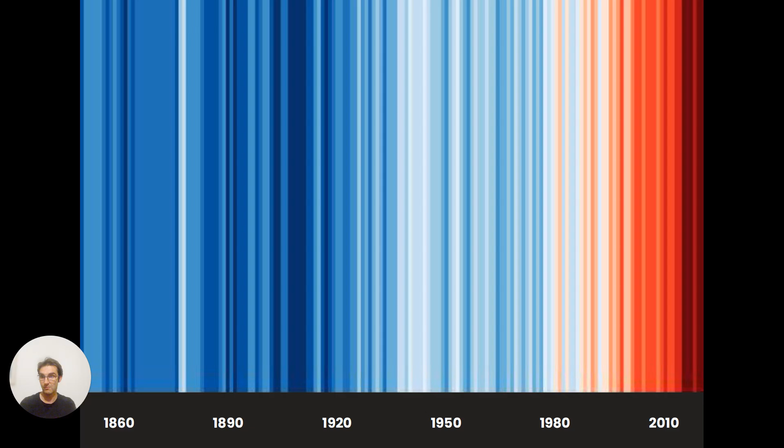In terms of the town centre zone, we looked at the different demographics, and it was primarily married couples with children. More than 60% of the households are families with children. There have been campaigns for services to serve the growing population and the families, with a campaign for a new secondary school. And there have also been increasing national and global pressures, most notably with the rise in temperatures and also with flooding. And it's thinking about the Town Centre First plan in those contexts as well.

Ireland, like Newtownmountkennedy, has a population that is growing rapidly. Ireland, in the context of Europe's population, is growing very rapidly as well, and is projected to have almost a third increase from 2017 to 2050. So that's the kind of context that Newtownmountkennedy's Town Centre First plan is being developed within. So really, how do we respond to the recent rapid growth and ensure Newtownmountkennedy thrives into the future?

We also talked about the different themes in terms of heritage, green public space, mobility, energy, commerce, and community services. We asked the community to rank these by importance to them, and both the online survey and the in-person workshops got the same top three: green public space, community services, and mobility being the key focus for the community.

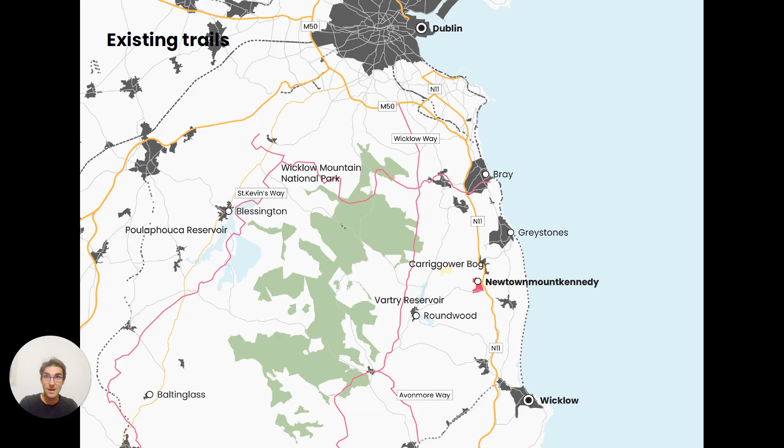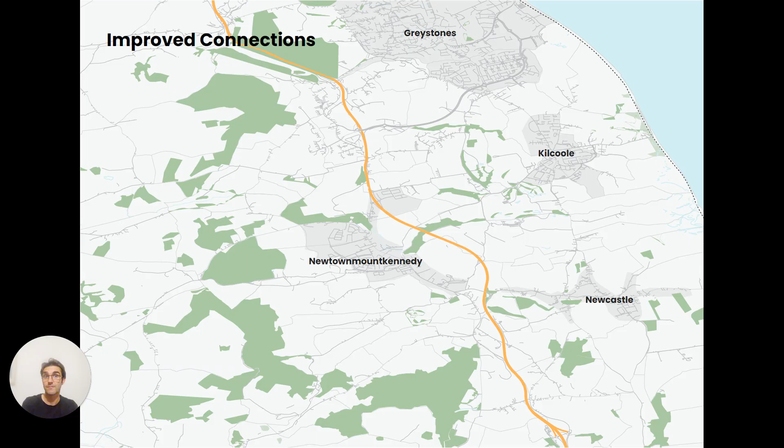So in terms of mobility, where Newtownmountkennedy sits in Wicklow, there are many existing trails beside Newtownmountkennedy. A lot of them pass by. There are some proposed trails, including the Mountains to the Sea Trail. In terms of connections, Newtownmountkennedy sits in relation to Greystones, Kilcoole, and Newcastle, and out to Roundwood and the Wicklow Mountains National Park. So one of the first proposals was this idea of linking in with the Mountains to the Sea trail, connections potentially to Greystones, to the East Coast Greenway, the informal Greenway as it is, a potential Newcastle connection, and the existing bus networks, how it currently works.

And one thing that became apparent through the initial discussions was the current way that public transport is set up. For example, to go from Newtownmountkennedy to Kilcoole, you have to take two buses. It takes 54 minutes, but if you walk, it would be 57. So there's a massive opportunity there to improve the bus network so that it's an easier way to take the bus, and probably get people out of cars and discourage use of the private car.

Between Newtownmountkennedy and other towns around, you're seeing the same issues, where because the public transport's not aligned, it's taking quite a long time, even though the distance is actually quite short between the towns, between that and Glendalough, for example. So a potential proposal was maybe an application for a Local Link.

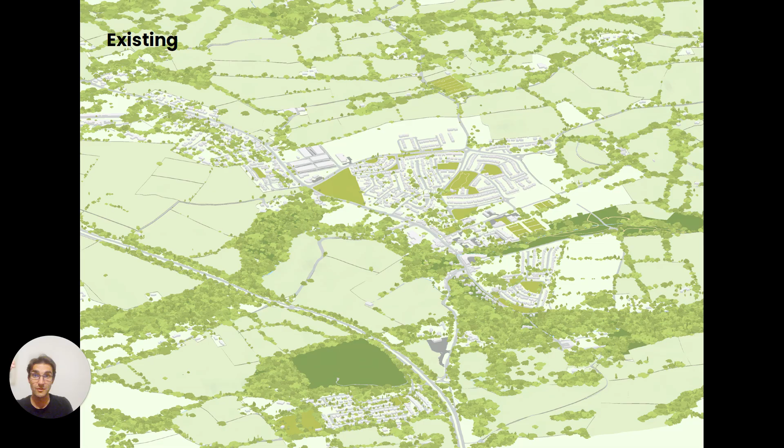So connecting between potentially Greystones and Roundwood and Kilcoole as well. In terms of the existing, we had a map that we presented out and showed the existing Newtownmountkennedy and then the areas that I think are under development or are in planning currently or proposed. So seeing that there's even further expansion planned for the town, despite all the expansion that's already happening, so there's a lot more residential units coming.

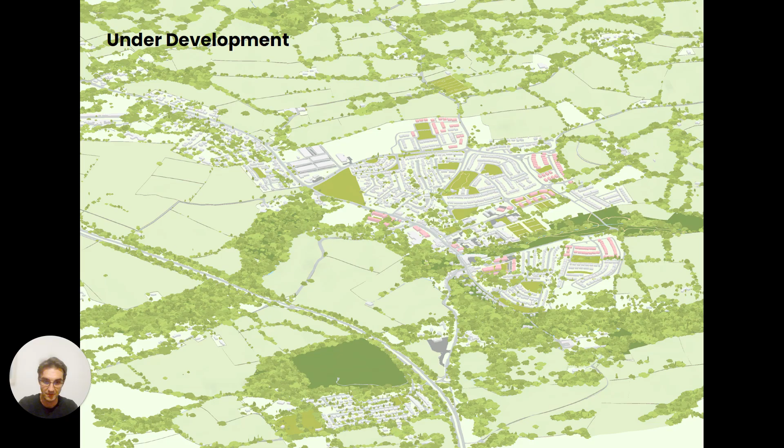The community highlighted some of the key challenges with this in terms of narrow roads, in terms of bike lanes, the lack of bike paths or narrow footpaths, and where congestion was at pinch points. And we're going to show now some of the responses to the key challenges highlighted by the community in the first workshop storytelling.

So our key strategies that we developed from the challenges that were highlighted during the first workshop was to increase cycle and foot permeability, provide clear route hierarchy, improve public transport distribution, traffic flow optimization, discourage Main Street traffic, encourage Main Street footfall, and encourage active travel.

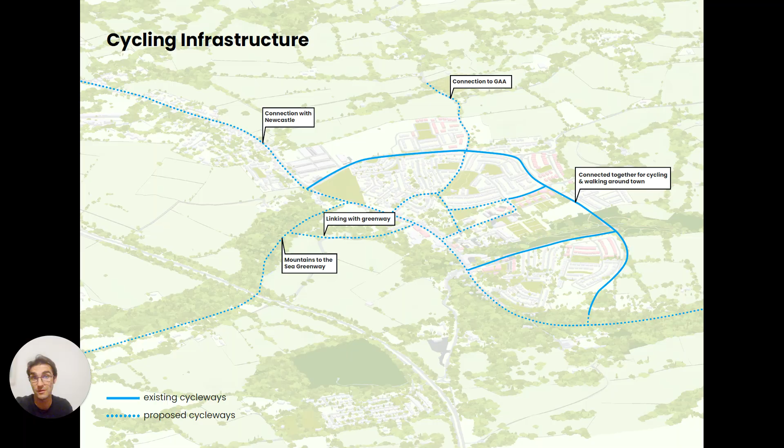In terms of the current bus route, we've highlighted where the bus stops are in use and also where the proposed bus stops are, the new bus stops that are being created but they're not being used. We've even proposed a new bus stop where it's earmarked for the school development. So maybe there's a potential alternative bus route that links around the new developments around the town without people having to go down to the main street to catch the bus.

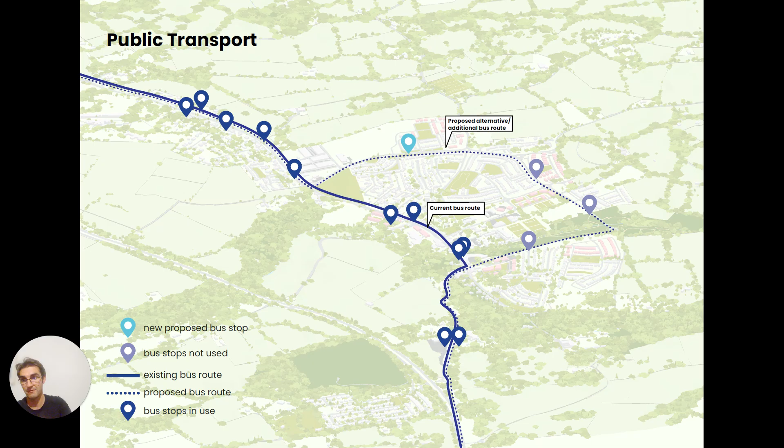And then if you see that overlaid with the cycleways, there may be opportunities there for potential bike drop-offs and taking one form of active travel to get onto public transport. So even incorporate principles like park and rides.

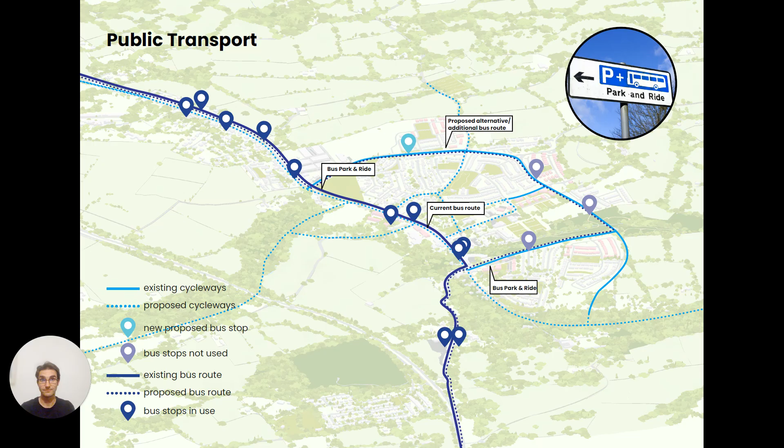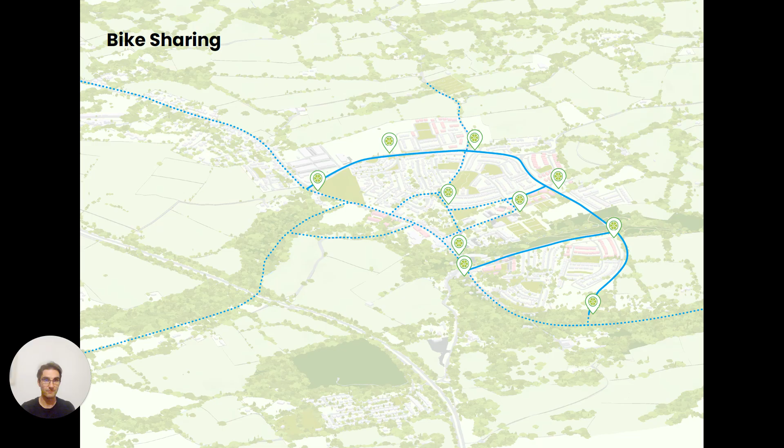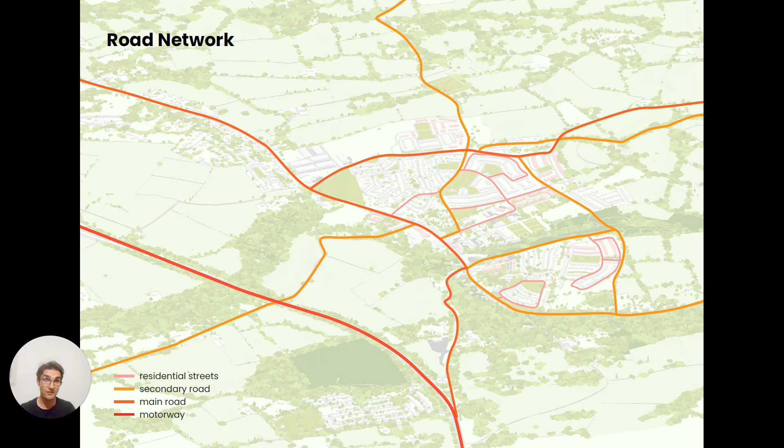In terms of the road network, you've got the main motorway to Dublin. You've got your main roads, your secondary roads, and then you've got residential streets. You've also got many dead end streets, and this is a problem that's been highlighted in a lot of our work across Ireland, where in residential developments the cul-de-sac is preferred, but what that causes is a lot of roads literally to nowhere, and as a result, there's not as much permeability in the urban realm.

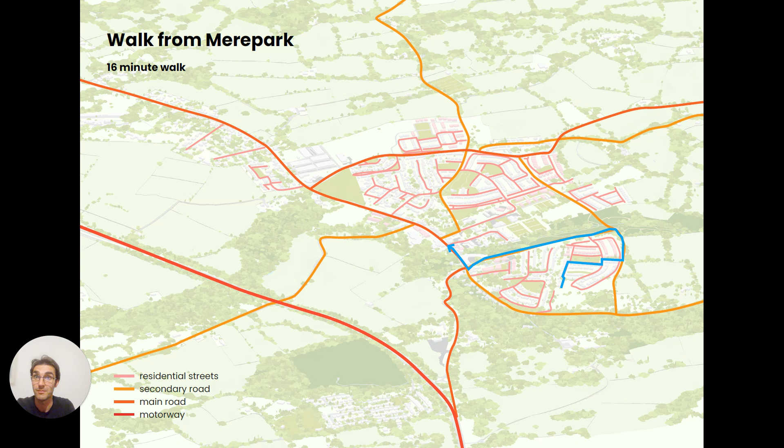So, for example, from Merepark, it takes a 16-minute walk, whereas if you actually had increased permeability, you could bring that down to a 10-minute walk from the same place, just to have those little connections at the end of what were cul-de-sacs. Same again from Monalin, with some increased permeability, you get the 9-minute walk down to a 5-minute walk. And this helps people make a choice of maybe not taking the car, but actually walking instead. So an example of how that could look.

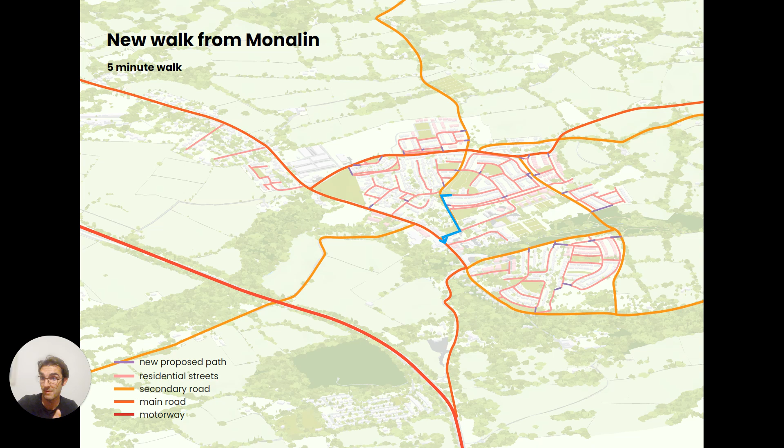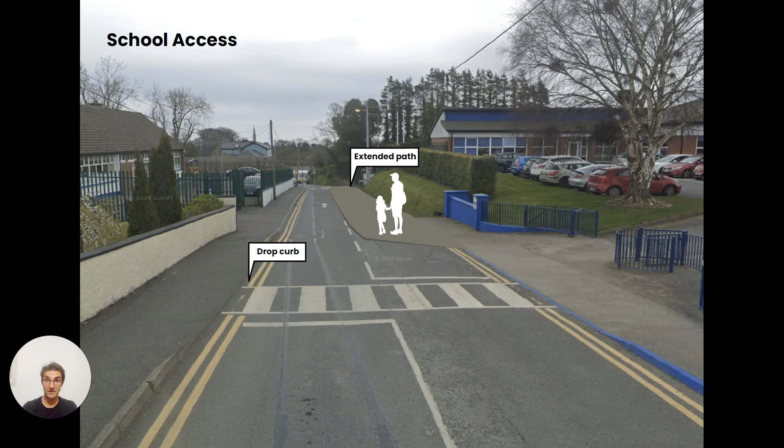In terms of some moves that could be done, we dropped the curb, which has already been done actually, extending the path down into the town itself, the main street. And also what we discovered was the current traffic movement, because it's two-way traffic, lends itself to quite a busy junction with the tight streets.

So one of the proposals from the community was potentially making this a one-way system, which does a couple of things. It encourages the use of the ring road, but also it gives us a lot more space and the opportunity for a drop-off lane where there is a series of schools and creches and community spaces. So it makes it a safer space as well. So this could be the potential situation if we did drop it to a one-way road with a drop-off lane.

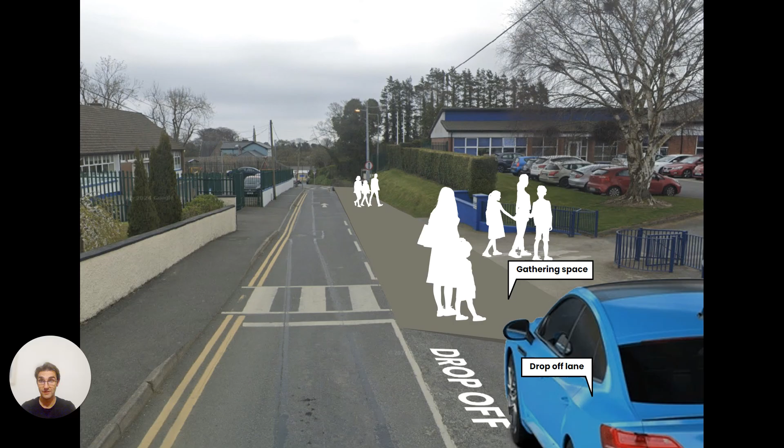You could have some gathering spaces for people to gather, instead of it being dominated by two lanes of traffic. And then maybe some additional space, you could even look at bike paths. So these are some of the improvement proposals. In different ways you could even approach that from further down where Duns is. Different ways of managing the traffic flow to actually alleviate some of the pressures.

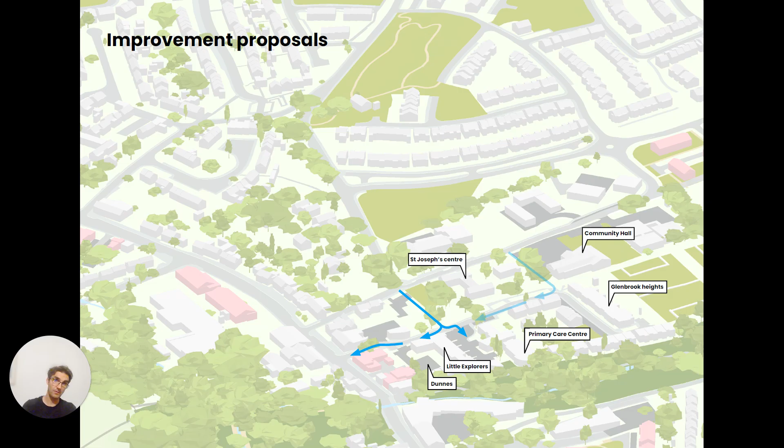In terms of mobility on the main street, people discussed the traffic lights were causing delays, and there was a proposal potentially for a roundabout on that junction.

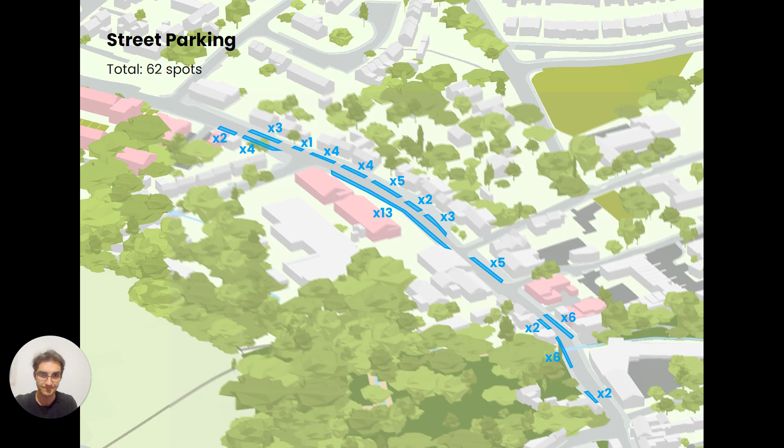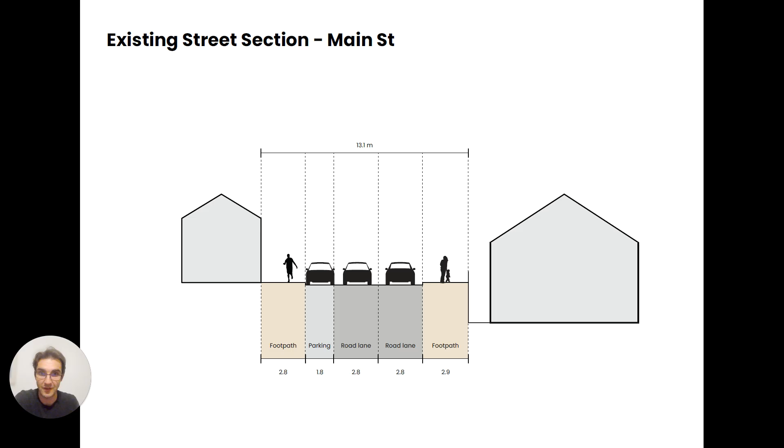In terms of street parking, there's 62 spots currently on the main street, and the current section with two lanes and one for parking, you've got a 2.8 to 2.9 width footpath. This changes a little bit as you move up the street, but that's from the section line we took in the middle. So if you were to make it two lanes with two-way cycle lanes, you would have to reduce your footpath down to around 2 meters. And that's what it would look like.

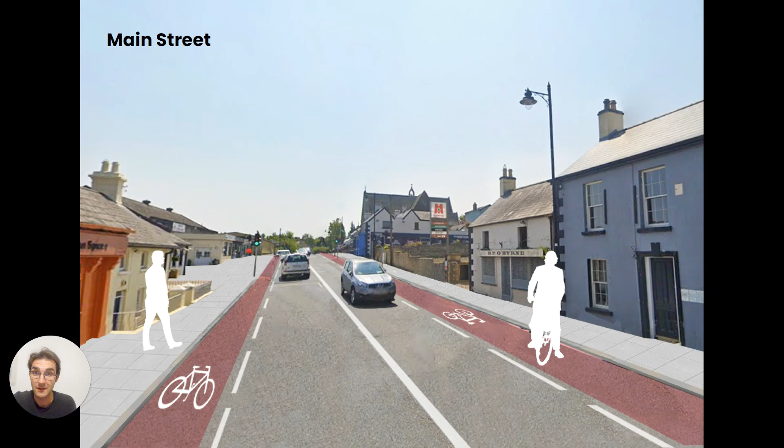And also a lot of people were talking in the surveys about areas for safe crossing and traffic calming measures along the main street due to the heavy congestion with cars. Discussions were had about the potential for slowing down and increasing main street footfall through the potential use of shared surfaces and extending the public realm as well.

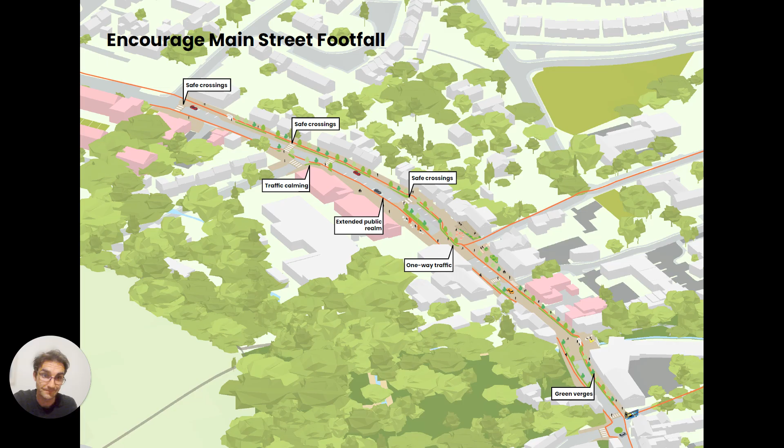Other discussions were around the current traffic flow. So currently, as per Google Maps, it takes 2 minutes to go along the main street from the Fisher's roundabout all the way down to the Wicklow Way and the brewery and the enterprise centre. But ideas were highlighted about a proposed diversion where you use the new roads created around the town and create almost a one-way system along the main street.

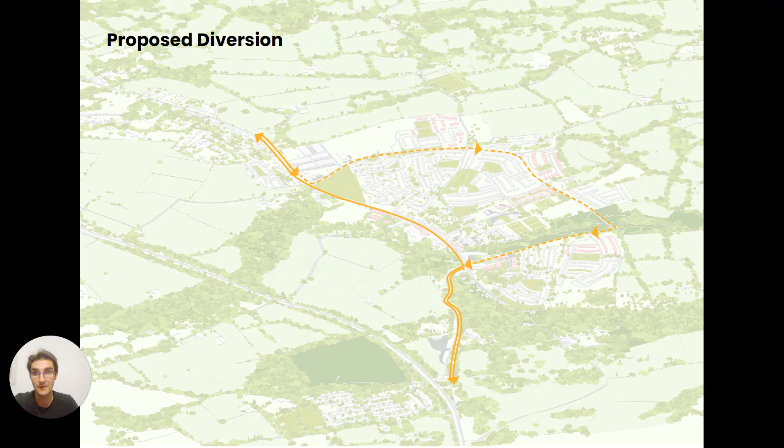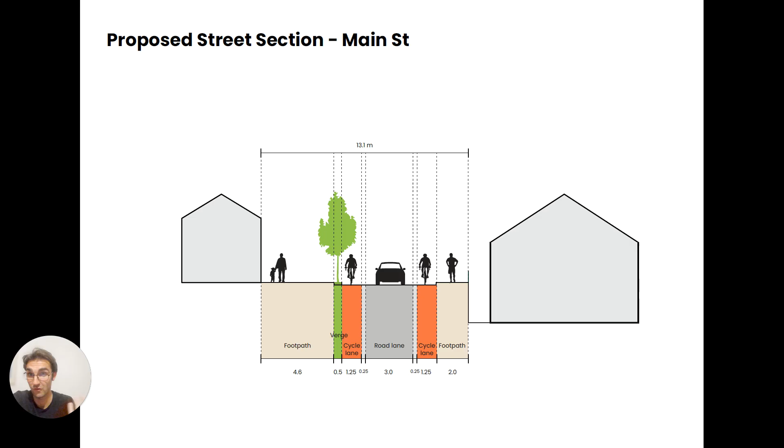Currently, according to Google Maps, it is 3 minutes to go around, but there's a massive gain there if you do move to a one-way system down the main street. If we left it with two lanes of traffic and two-way cycle lanes, versus switching to one-way traffic, you get a lot more space for people on the main street and also the opportunity for potentially a green verge or some tree planting. You also have the opportunity for more parking on the main street because you don't have the space challenge of having the two lanes.

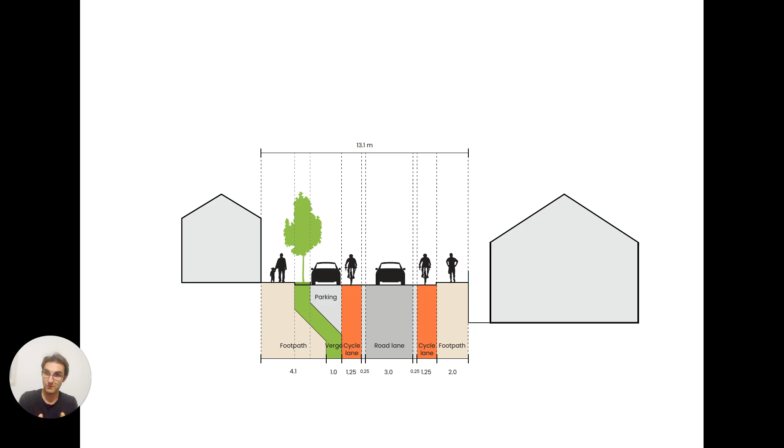So this could be what it could look like with the introduction of a green verge and potentially some trees on the main street, but also additional parking spaces as well. And with that green verge, we could also explore the idea of sustainable urban drainage, and that discussion we were previously having about what makes a climate resilient space. Ireland is going to become warmer and wetter, with higher temperatures but also higher rainfall events. So how we could use sustainable urban drainage to help the town adapt to that change in climate.

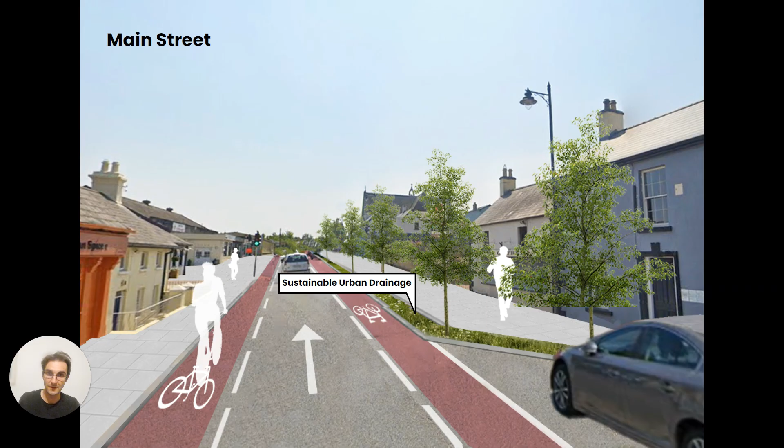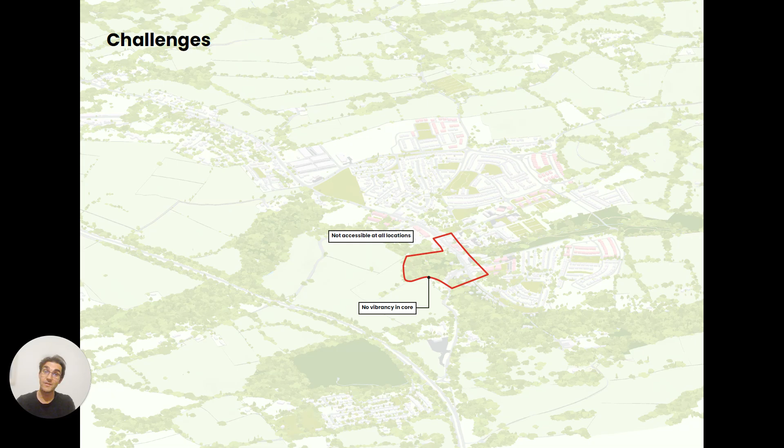The lack of vibrancy in the core and not accessible at all locations. So what we were looking at in terms of strategies was providing a generous public space, making the public realm accessible and inclusive, integrating climate resilience, include trees and greenery, showcase historic spaces and buildings, encourage vibrancy, and create a distinct town branding.

So due to the location of Coillte's headquarters, there were a few ideas put forward about leaning in on that and the idea of using timber in your street furniture as a way of highlighting Newtownmountkennedy's kind of unique location for the headquarters of Ireland's Coillte.

In terms of Fisher's Square, one of the ideas of how to explore how you could maybe better utilize that space as one of the first things you see as you come into the town from the north. So maybe opening that up and creating a public square, incorporating some rain gardens, nature-based solutions, examples of the timber lighting or the wood street furniture we discussed earlier.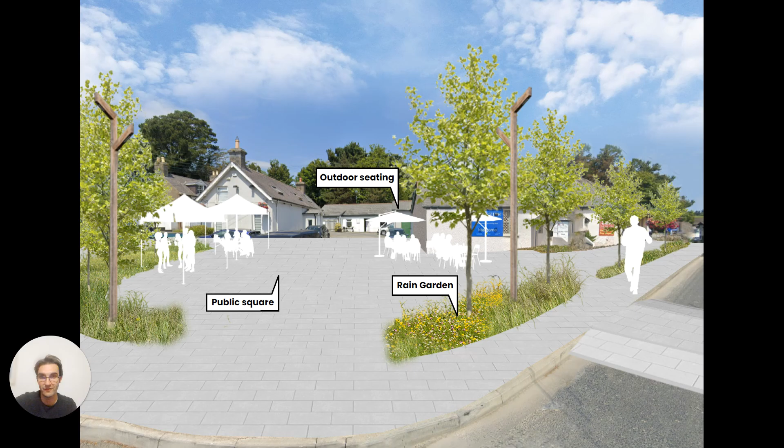The idea of potentially a town square and what that could be like. So looking at the space between Dunnes and the Parkview Hotel, potentially decluttering some of the space from some of the different things found on the main street. Bringing in the idea of more public space, maybe a bit more shared safe surfaces, safe crossing, incorporating with the cycle lanes previously discussed in the mobility, and bringing in nature and the green verges as well and the town branding aspects.

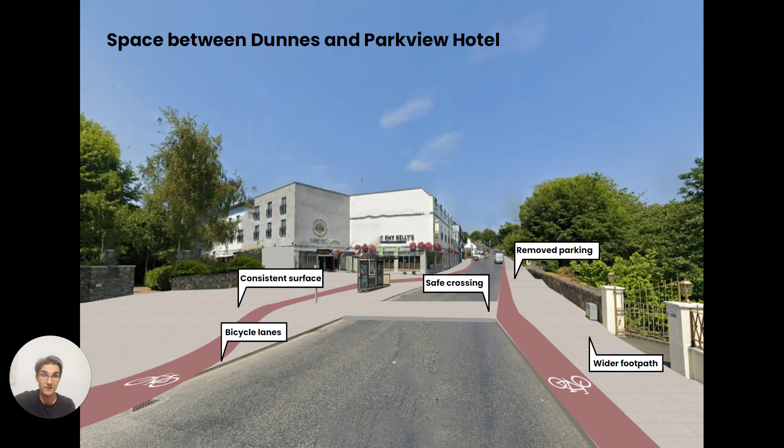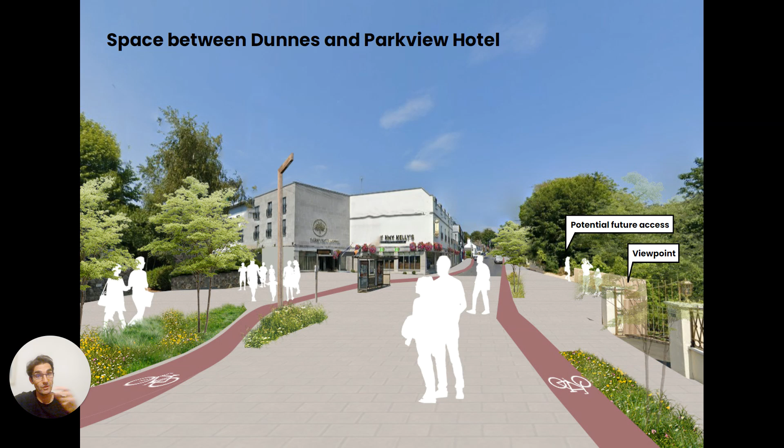So you can start to see some of these ideas being layered up again, and some of them are overlapping. But could this help to maybe create a more distinct town square? And again, the principles of shared surfaces. Learning from that, maybe some ways of doing that materiality that can make it a bit more accessible, increase the accessibility as well for some distances. Discussing potential future access and viewpoints out maybe into the valley from this town square. So viewpoint.

In terms of the churchyard, beautiful church, around halfway down the main street. Looking at how that would look with a new kind of public realm, and potentially even just removing the fencing. It was built for a reason at the time, but in some ways it's such a beautiful building to be celebrated. You can actually see it and have more of a connection with the building itself visually.

Accessible spaces. People were talking about access to the shops, making sure that they can be accessible for all, and that's one thing we want to create in all our spaces, that they are inclusive and accessible spaces for all. So playing around with how we could work with the different levels to allow people with disabilities as well to access the different shops on the main street. This could potentially take the form of integrated ramps.

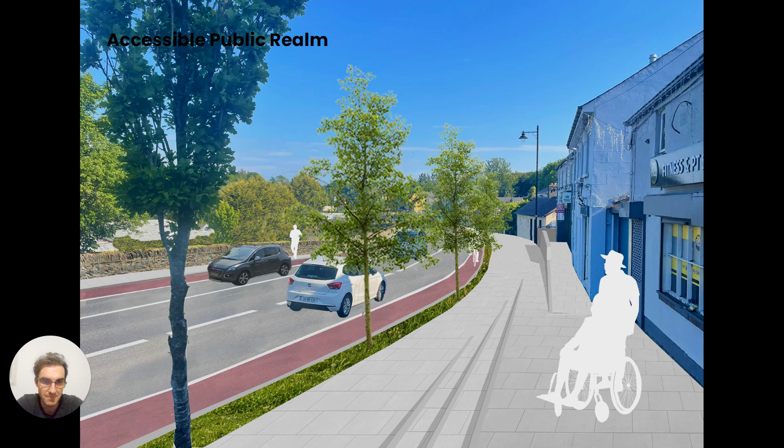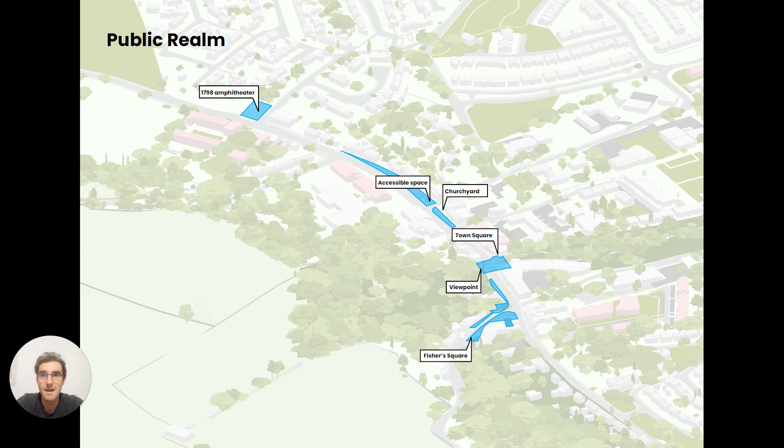There was talk about celebrating the town's heritage a lot in the feedback from the storytelling phase and the 1798 memorial. Could we better utilize that space? Maybe incorporate some sustainable urban drainage, but also some outdoor seating as well. Maybe using the same stone or whichever surfaces that we choose in terms of the development of the public realm.

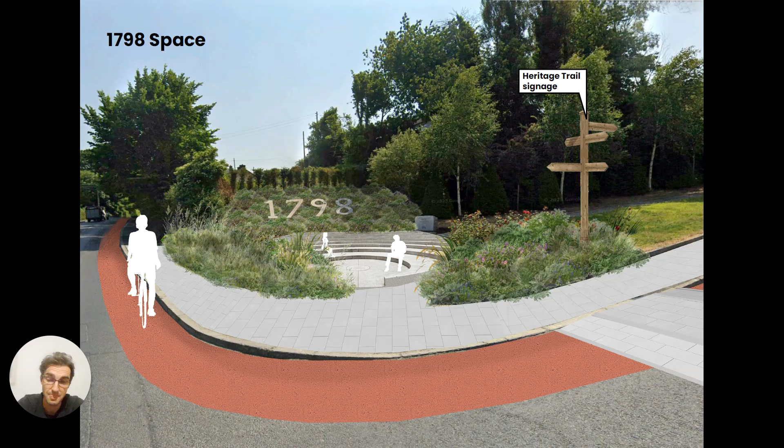Heritage trail signage as well was brought in because there already is an existing heritage trail in the town. Even during the first workshop, there were some interesting discussions where we were presenting back the heritage, and a lot of people came up after and were like, I didn't even know about that, so it's making this more accessible and people more aware of that. So could we take some of the great work that's already been done and use wayfinding signage to actually celebrate the town's existing heritage? So through creating a heritage trail.

And what about the green spaces in Newtownmountkennedy? So some of the challenges were the lack of connectivity between these green spaces, accessibility issues, a lack of variety, and the linear park with the unconnected plots with different ownerships. So one of the key moves that was brought up again and again was linking and developing these green spaces.

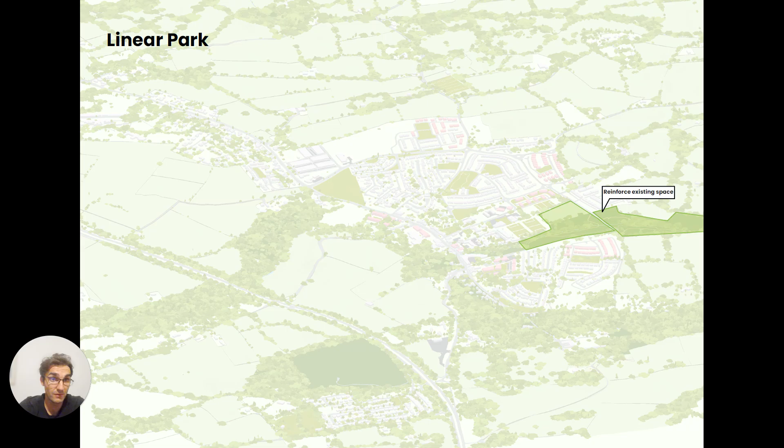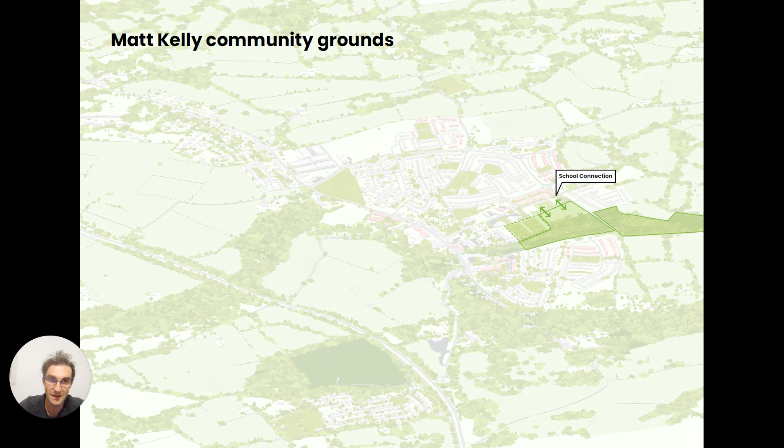So reinforcing the existing green spaces, and this is the proposed development that's currently being built, but connecting them with the existing infrastructure that's there and the schools that already exist. So you can see the connection here, the new linear park, but it not being integrated with the existing, and this lack of connections with the existing school that is there and the playing fields.

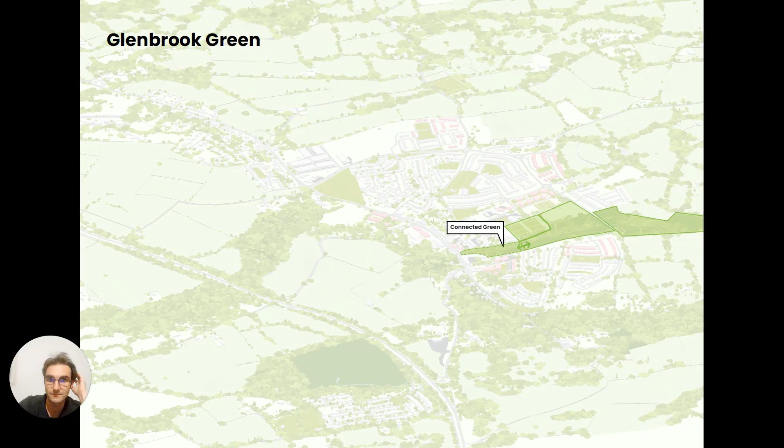So connecting in with the green. And also, in terms of accessibility, if there is a slope, how do we work with that and maybe have fun with that and actually create spaces that can be playful, even if there are some topographical challenges. And if there's water, how best we can actually integrate that in as well into the design.

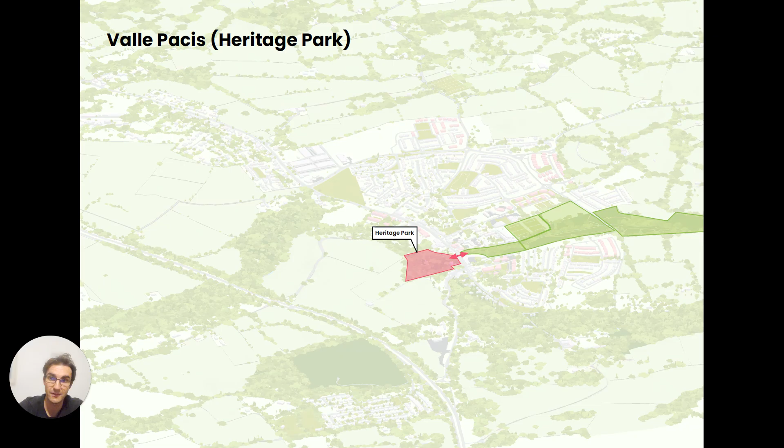So potential future connections as well. So first one linking, second one the potential future connections. In terms of linear park, a lot of talk was about Valle Pacis in the centre of the town as well, and the potential of that being part of a kind of a heritage park, having a form of connection there. And potential access from the main square, if we were defining the outside the Parkview Hotel, that being the new square in the town, could then be a linkage into Valle Pacis from there.

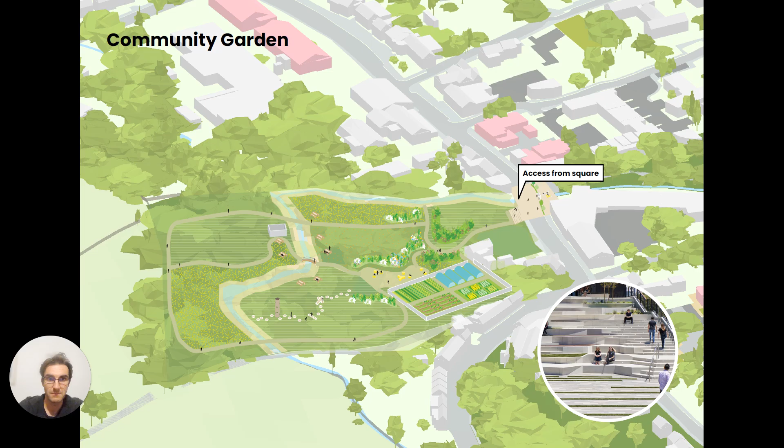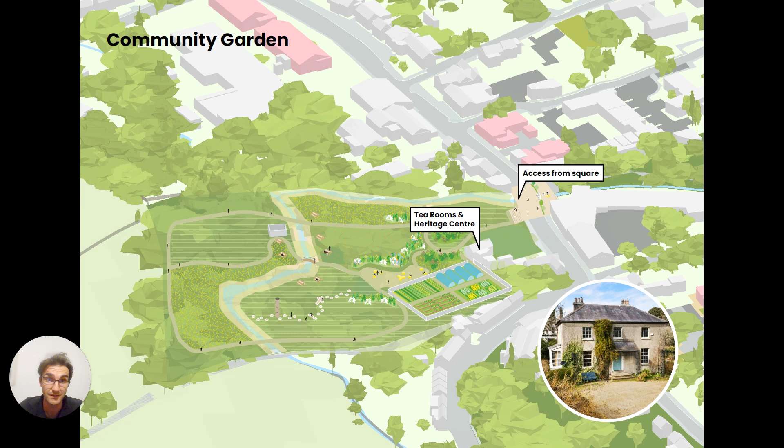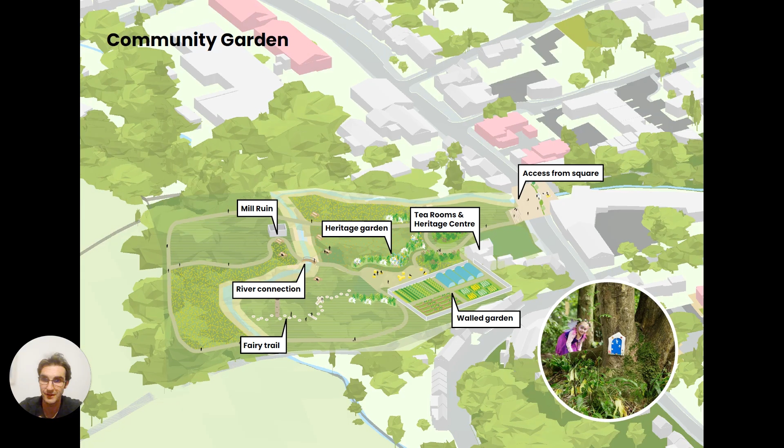The different buildings that already exist on it, could they be utilised in a different way? Maybe bringing in a fairy trail, the current usage and potential usages, and the existing Valle Pacis with really old growth trees. And how we could maybe create a riverine walk so people could actually enjoy that, but making sure that it's very, very low impact in terms of how we bring trails through the site so that it's maximising and maintaining the high levels of biodiversity that already exist on the site.

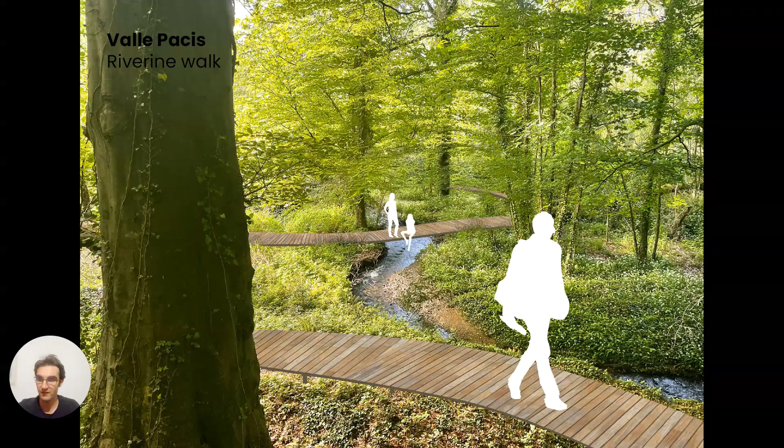There's a fantastic mill ruin there. How do we develop that, or do we develop that? Different opportunities, potentially it's a picnic area or a playground or just a place to hang out and enjoy the nature and the space. Maybe it's about restoring it back to what it previously was. Again, these are different ideas that were proposed by the community. We are just trying to visualize back the different opportunities that exist.

An example of one of ACT's projects that's currently going to planning, where it's taking an old building that initially the community were looking to develop the site, thought it wasn't worth keeping, but through the design process, it actually became apparent that this was part of their heritage of the area, and the old landlord house being actually maintained and restored in a way where it was reused or readapted in a different way, and actually led to being a kind of gathering space and a viewpoint space, and creates its own interest in architecture as a result.

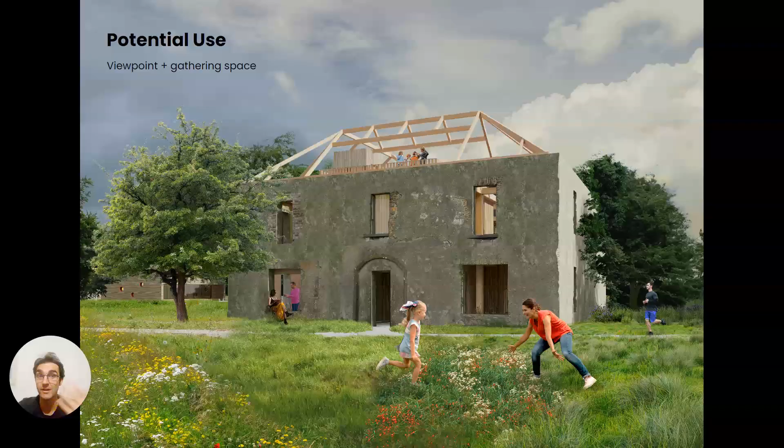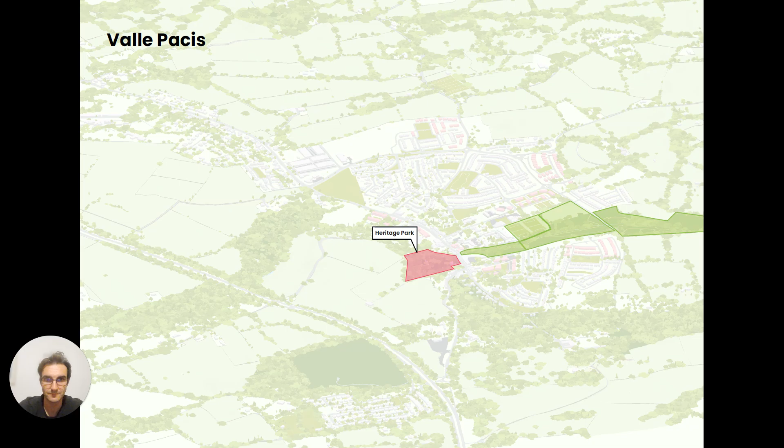And then the potential for linkages. It's a lovely green space, and we heard in the workshops this was actually the place where many people went sledging when it was snowy on this hill. Maybe the potential for an amphitheater, or maybe even a natural, very low impact one, maybe not as engineered as this, but maybe just working with the slope. That was one of the ideas proposed by the community.

In terms of the Wicklow Hills Park, there's discussions maybe of using the height, maybe having some form of viewpoint. That was another idea that was proposed, reimagining Wicklow Hills Park. Maybe a dog park. There were a lot of people discussing the areas. There's a lot of residents moved in. A lot of them have pets. Can we have a designated spot for dogs? Maybe a pump track for teenagers.

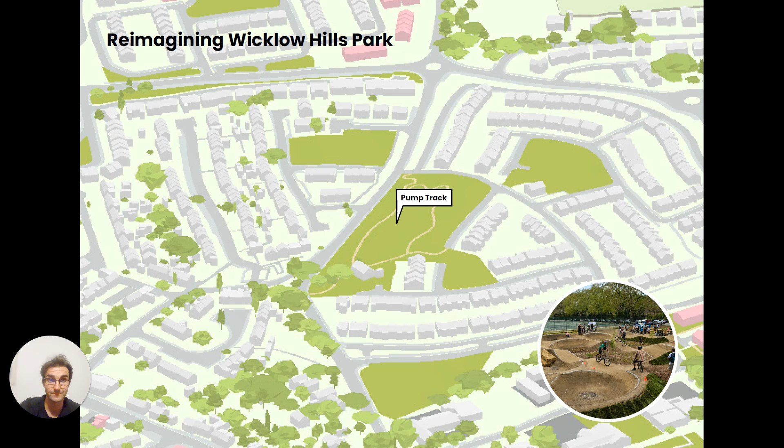In terms of the community services, one of the key things that was very apparent in the storytelling was with the rapid increase of housing, the services to facilitate the housing weren't keeping pace, so there were a lot of gaps. So we obviously mentioned the secondary school, but there's other elements that were called out: no secondary school, no outdoor ATM, no bank, lack of youth services, no library or civic space, and different services that need to be filled for the town to be able to grow sustainably. So some of the key strategies we looked at were defining potential sites for community services, proposing combining complementary functions for efficiency of space, and considering future growth in service provision.

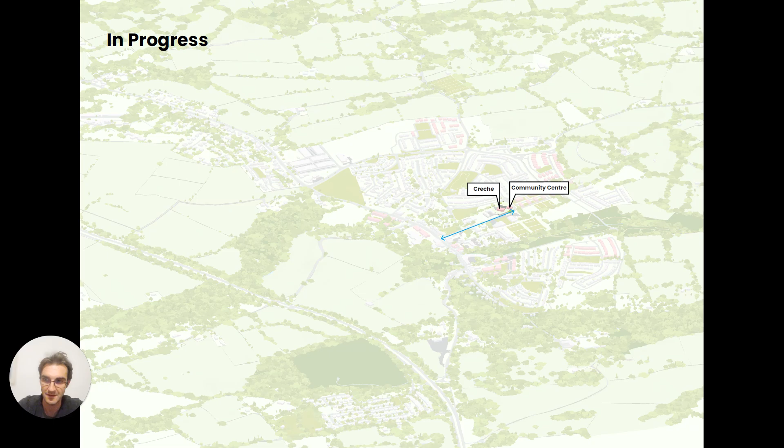So again, it's good to see that the creche and the community centre are currently in progress and are being constructed out of CLT as well, which is a very modern method of construction, timber as well, tying in with the Newtownmountkennedy location as well. What other potentials exist for community services? That was the question we were asking ourselves, and looking at potential vacant sites and seeing how they could actually be utilised in the designated sites, obviously from the school.

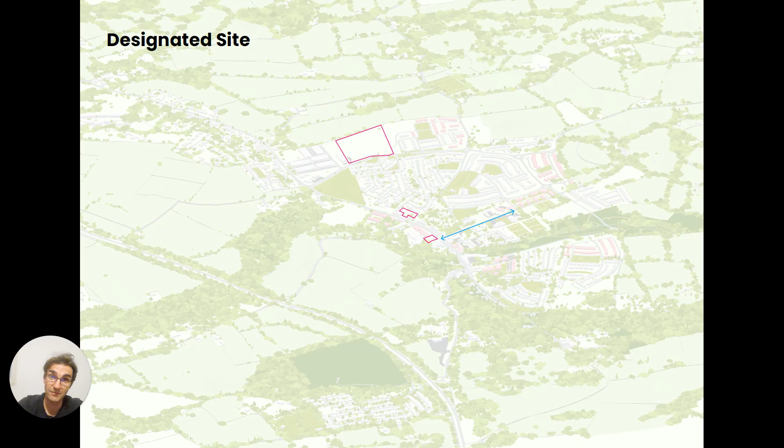So one of the key things discussed was the civic centre library. We felt that might be a good location along that main spine where many of the services have been kind of clustered, as you can see here. So could we utilise that space for a potential civic centre library?

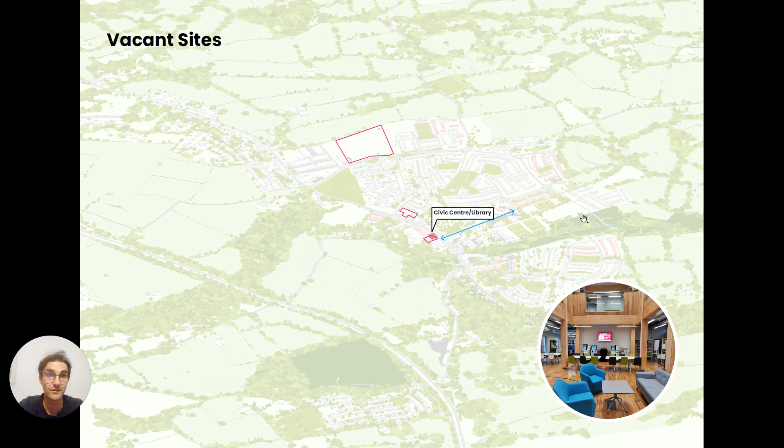So you see it coming down the hill between St. Joseph's and Robert Monteith. You see it's an opportunity for maybe a building that can be viewed from all four sides, like a public civic space, a civic building, and it could have different functions from the rear and the front, street facing.

And if we were tying it in with a strategy of developing a town square on the front end with the potentially single lane traffic, or whichever way we're going to develop that, there's lots of opportunities to make that building a very visual, prominent building and a good civic building for the town.

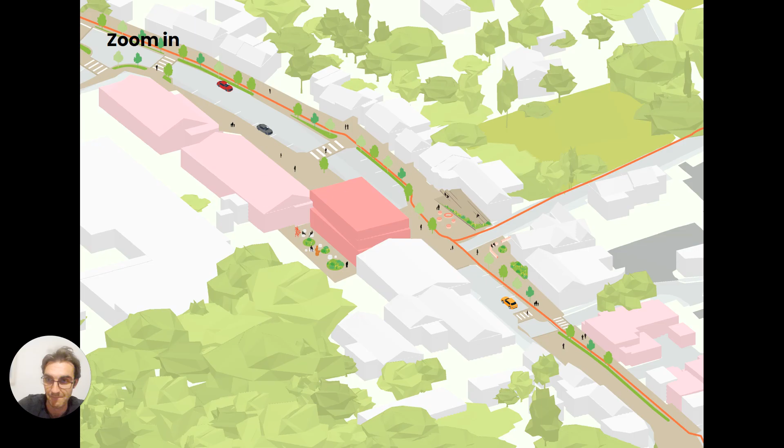Also looking at the idea of backland development as well. So there's several vacant sites, how we could better use them so you could step off the main street and have your facilities maybe clustered within a kind of separate little courtyard, maybe a space for a youth centre, a family centre, a GP. So this is what it could potentially look like off the main street.

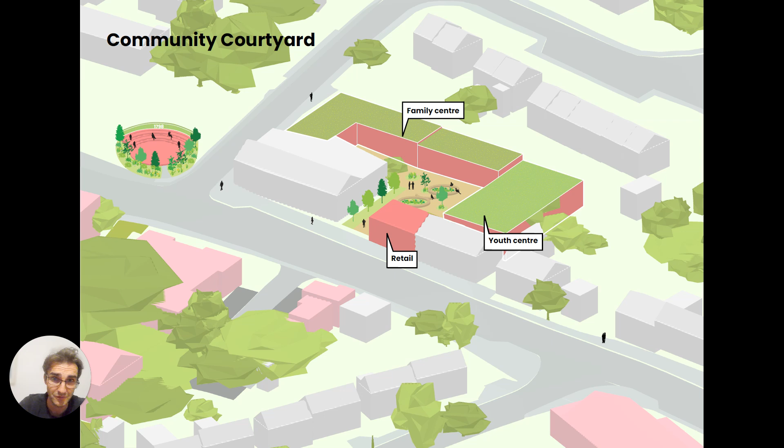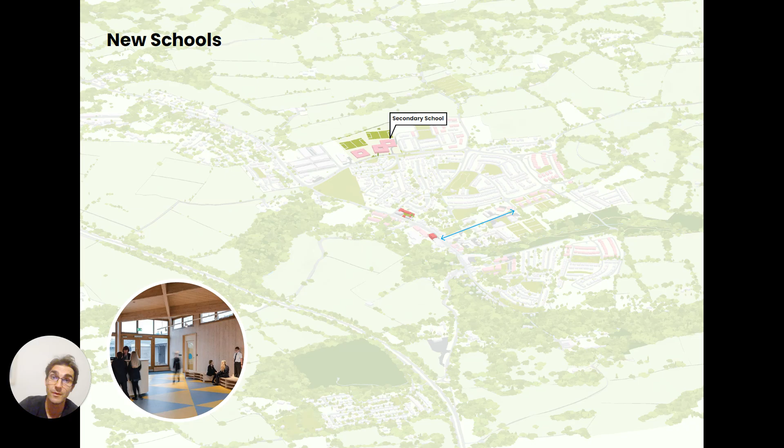And then looking at how the secondary schools could be developed up there on the hill where it's already been designated for a new school, tying in with the campaign. And maybe looking at primary school, there was a lot of discussion about the potential of a forest school, tying in again with Newtownmountkennedy being known for the Coillte headquarters. It has lots of woods around, so there's some opportunities there.

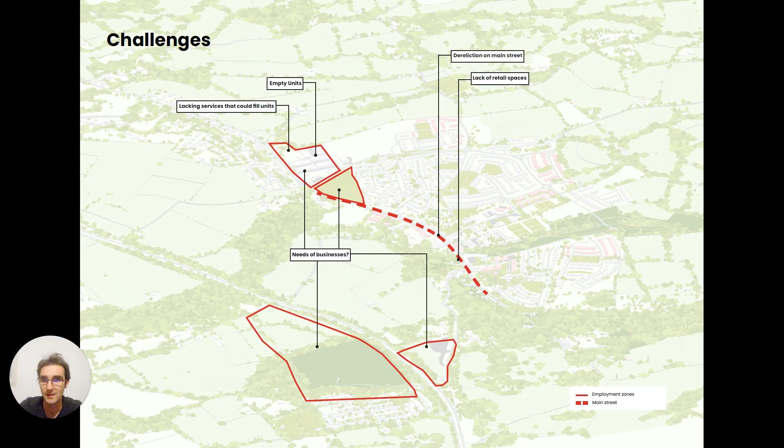And then in terms of employment and commerce, people were talking about lack of services and spaces for developing commerce and employment zones. So our key strategy was identifying key opportunity sites, encourage functions that match the image of the town, encourage mixed-use areas, reuse of vacant structures, densification of the urban core. So on one of the vacant sites, we looked at how you could explore a mixed-use development on that site.

And some of the ideas of, instead of having just one type, residential or commerce, having different types in one area. So it is a mixed-use development, tying in potentially the park and ride idea previously with the mobility idea. So trying to blend a few of the different features that were proposed by the community in the first workshop. Different potential opportunities of site activation.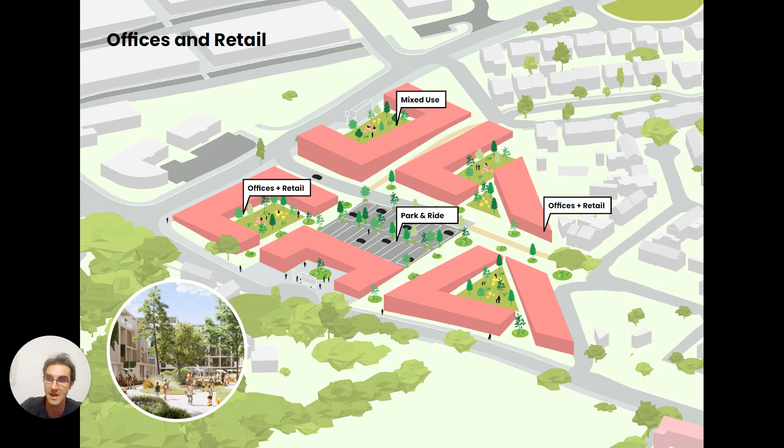Another aspect that was brought up was this idea of self-sufficiency in growing food on site, and looking at how that could actually be done, maybe bringing in polytunnels, a local co-op or a potential food growing area. So looking at different social enterprise market examples, one in Dublin, one in Limerick.

So growing local food in the town, and building on what we discovered during the discovery period process. There's lots of local food production already, and different companies have set up. So building on that brand and heritage already, and focusing on local production. Again, it could be different uses. So this is the idea that we're being very propositional back and forth.

It could be for local agriculture or locally grown food, or it could be for a dog park. Maybe the previous dog park location wasn't the right one. Maybe it's more suitable in this location. Or it could be an area for biodiversity, bringing more nature into the area. Maybe it's this area for focusing just on youth, like a youth centre, maybe the skate park, and a gathering space.

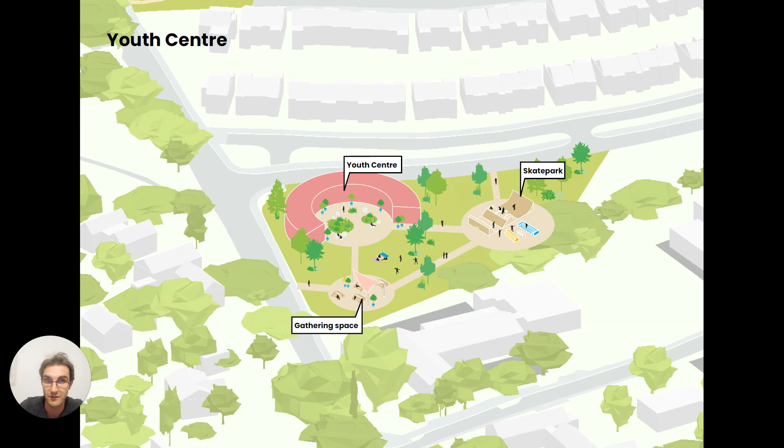There were discussions as well about this existing building that's found within the forest. Could this be a gateway centre, if we were tying back to this idea of the mountains to the sea forest walk or greenway? Could this building then be retrofitted or expanded and bring other aspects into it, like bike rental, an exhibition, a cafe within the forest? Maybe even tying into this idea of the woodland activity zones, and utilizing your forest in a different way.

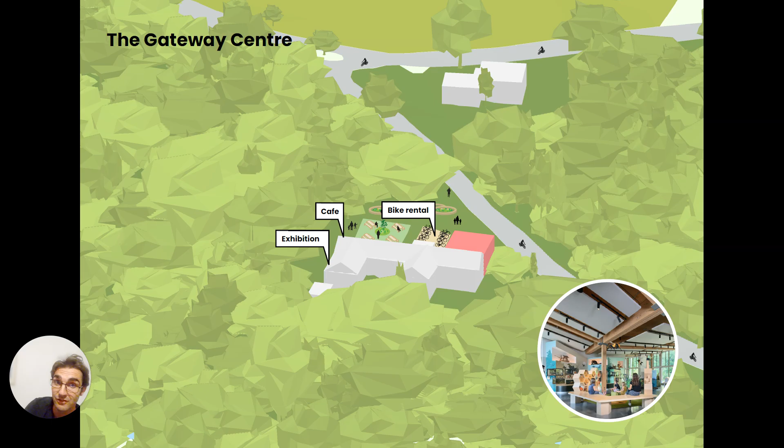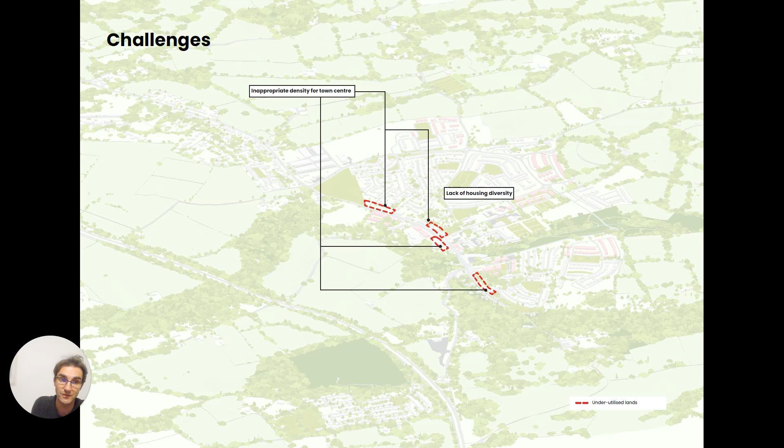So what other options exist for commerce, services, and residential? Well, there's also a discussion about densification and lack of housing diversity. So looking at the town centre analysis, what's currently being used and the different mixes that currently exist, and then seeing where there's an opportunity for densification. So these images are just to show, taken from that image, where opportunity sites are for densification.

If we were to increase the density of the buildings in the town, how would that look in terms of the scale of it?

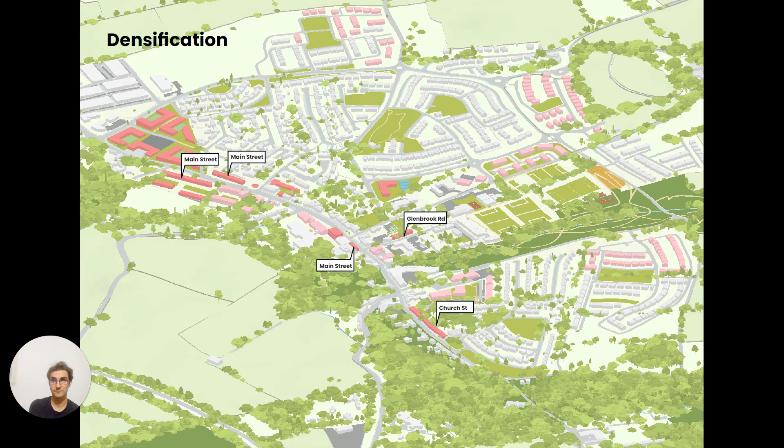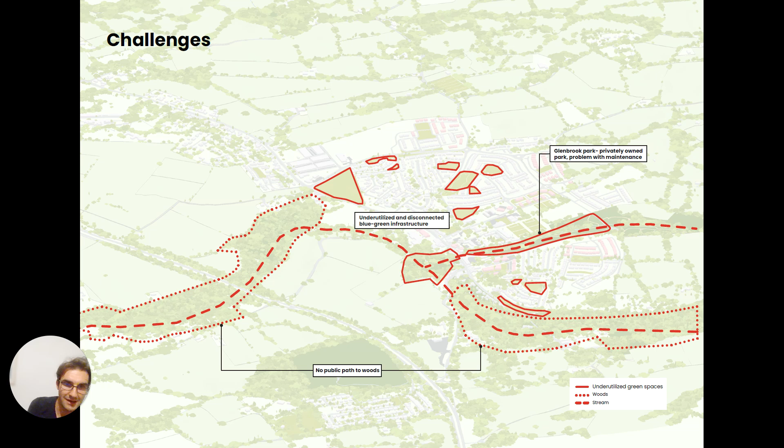Just layering up, potentially if we have the mobility and the overlap of mobility with increasing the green space connectivity at the same time. Again, just being propositional to see how best this could work for Newtownmountkennedy. So you've got the big, large woodland park, and also the existing woods. Is there an opportunity to connect?

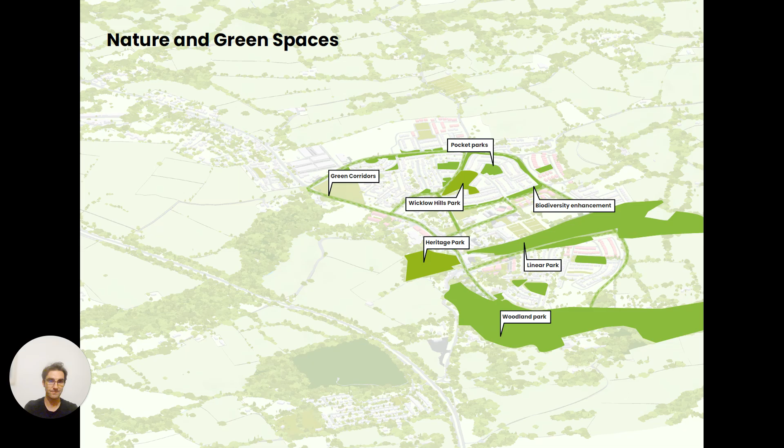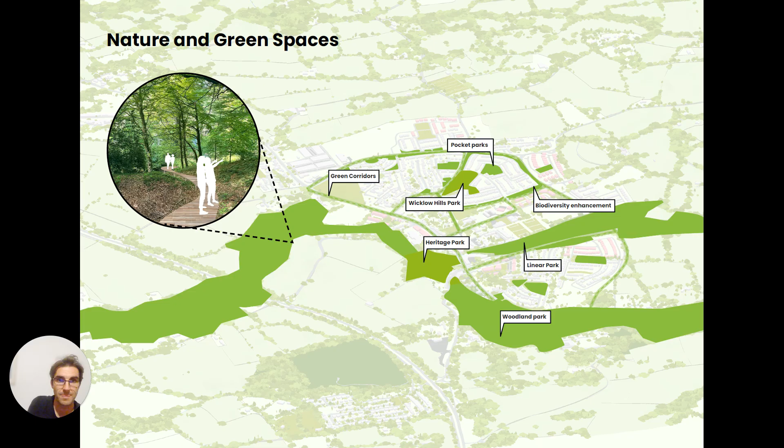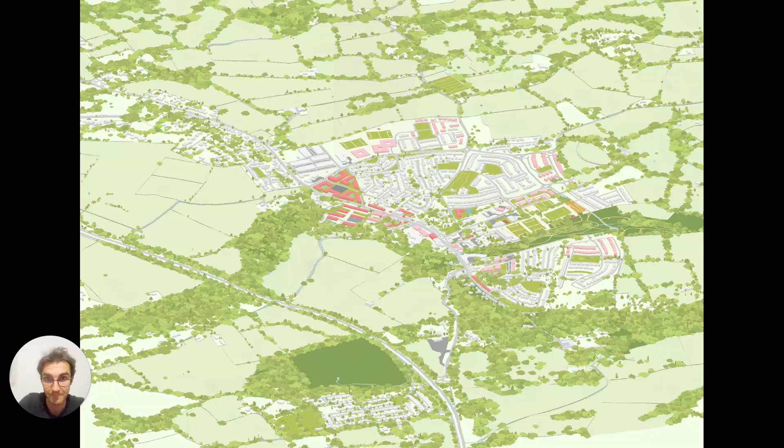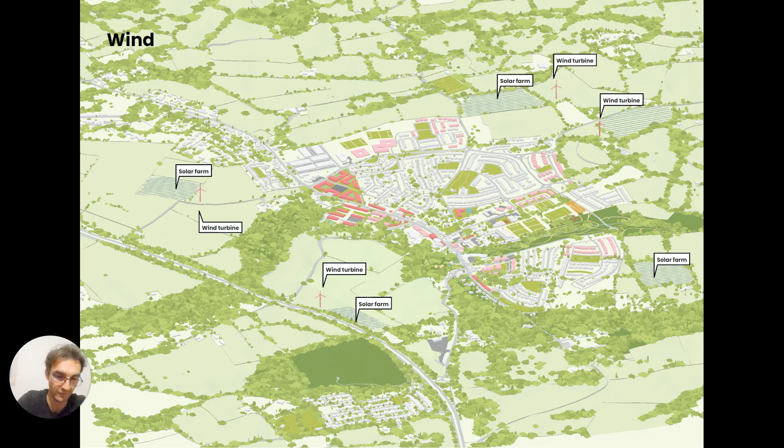So a lot of the development has been to the west, if you're looking north, sorry, but there hasn't been much to the east. So as the town grows, do we want to just keep the town growing out to the west, or is there an opportunity to link in and in terms of the road network almost create that loop? And that would allow for additional growth out to the east.

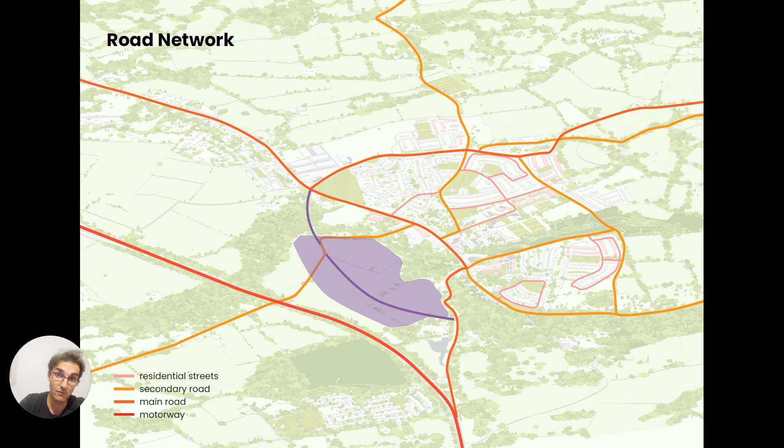And potentially in that growth, we could then explore different models of development rather than single-use development. It's not just residential; it's a blended mixed-use development of residential, commercial, potential to grow, youth services, energy production, and trying to see could Newtownmountkennedy have an opportunity to explore different ways of development in terms of how it does its uses when it's building.